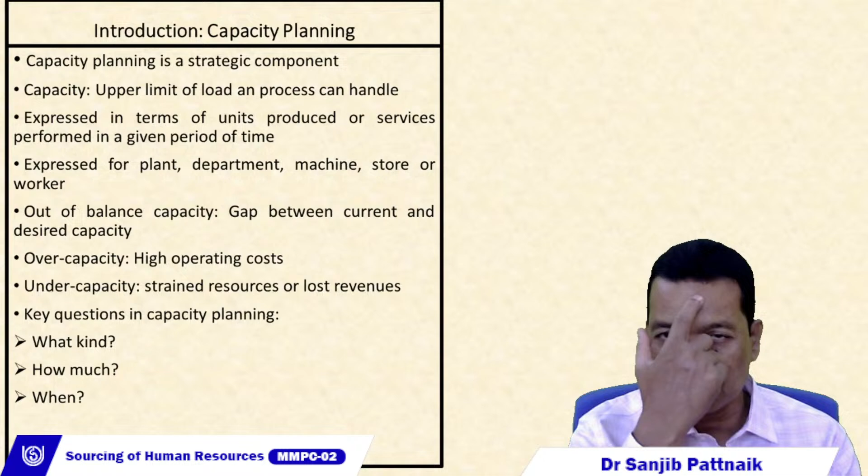Suppose we have gone for a 2 liter geyser when we had a small family. As time moves on and the family grows big, then we find the geyser that we have already installed in our washroom or the bathroom is not sufficient to provide enough hot water to the family members. And if we go for changing that, it will cost us a huge amount or a big amount. And once fitted, we go on using it till its life at least. Maybe somebody may say that it is for 6 to 8 years.

So always we say capacity planning is on a long-term basis of any organization. In other words, it is a strategic component of the organization. When we say capacity, it refers to the upper limit of load that a process can handle in a given period of time. As we are talking about the geyser example, we saw that the installed geyser was of 2 liters. That means the maximum water that can be sent into the geyser by the pipelines and the geyser will hold and heat it up is 2 liters.

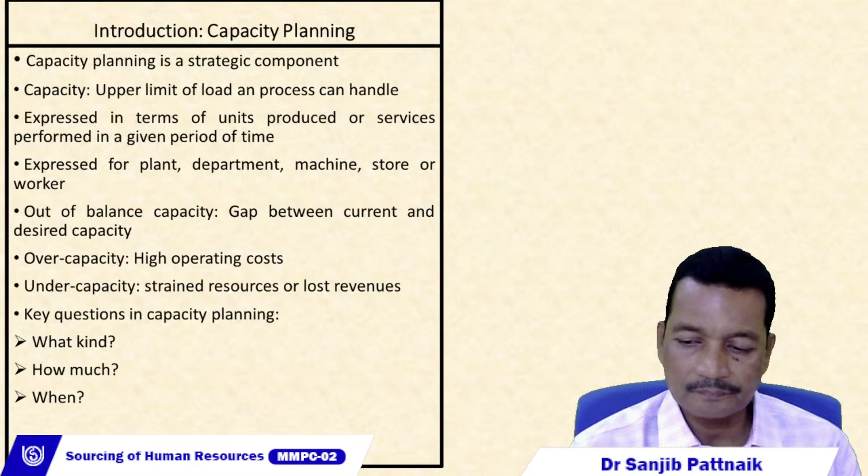Now let us see what is this process selection. When we are talking about process selection, we know that a number of processes are available for producing any product. So when we are talking of the process, it is the way of producing goods or services and how they will be organized in the factory place. This process design and capacity planning go hand in hand and influence the system design, because according to our capacity needs, the processes available may be varying. So we take both into consideration, the process selection and the capacity planning.

Now, when does this process selection decision arise? This comes into the picture when the organization is planning for new products and services. Now, in order to produce new products or to perform new services, what are the processes available to us? Out of that, which one is the best according to our capacity requirements or the future capacity needs?

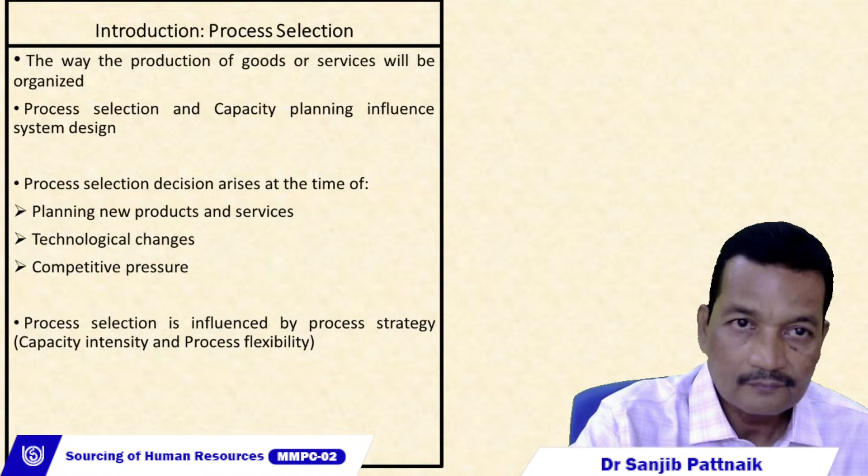Now, what are the different types of processes available to us in general, or what are the five basic types of processes? Here we have taken up five things: job shop, batch, repetitive or assembly lines, continuous, and projects. So here I'll try to take one example. Let us see their characteristics.

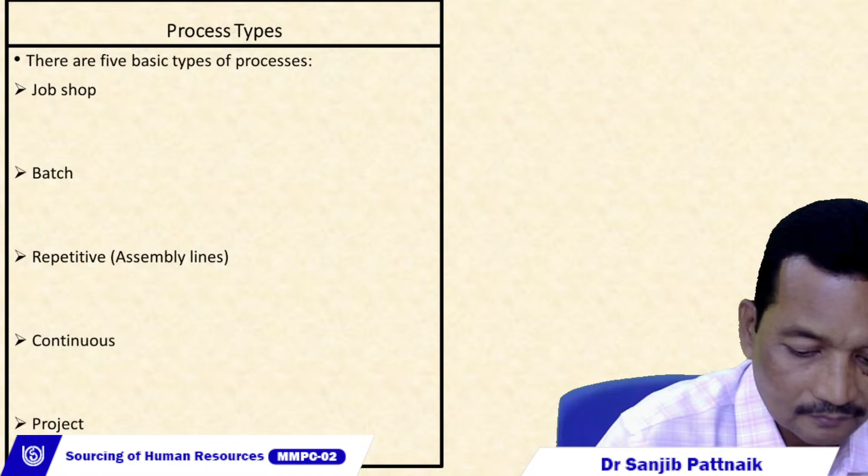All right. Let me explain the basic types of processes with certain examples. Job shop. I will try to say about the characteristics in terms of variety as well as the volume of production. For job shop, let us take an example of a tailoring shop. Nowadays, what happens when we go for purchasing shirts or pants or dresses, jeans, etc., from a supermarket? Suppose we go there in the apparel section or the clothing section, we find various types of dresses are being shelved.

There, you will find certain sizes like 32, 34, 36, 40, 42, etc. Suppose your waist is 39.5. Will that kind of thing be available in the shelf? No. Let us go to the tailoring shop. My waist is 39 and a half inches, suppose. And the tailor master will take the measurement, and he or she can produce accurately the required thing.

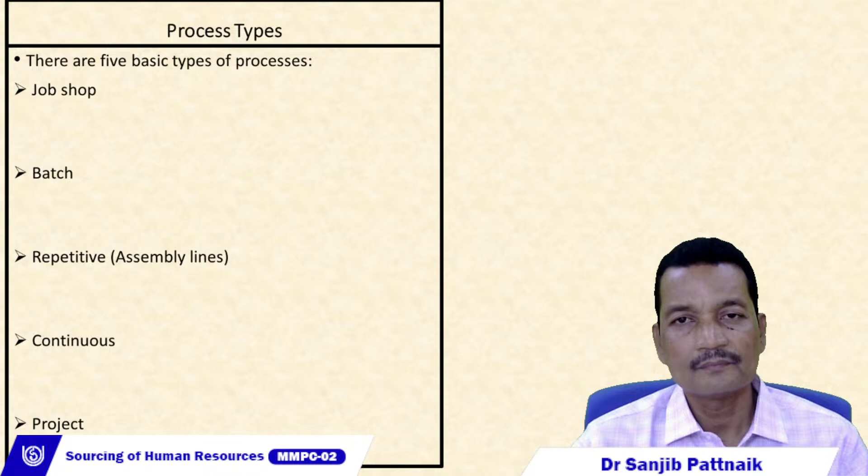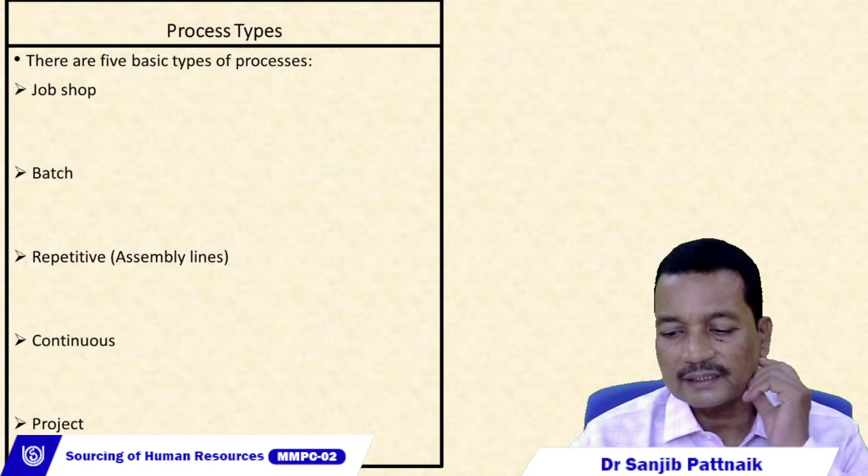One cannot say that the highway between A and B of 30 kilometers, whatever is the project cost and whatever is the way it is designed, is the same as the highway project between F and G, which is also of the same 30 kilometers. Each project will be unique. That means it differs from each other. But since the investment is very, very high, we say projects are the big brother of job shops. So these are the five basic types of processes.

When we look at capacity planning, the question is how much capacity we should set up first. Because once we set up the capacity, and it is a strategic decision, we have to continue with that for a number of years. If our forecasting is more accurate, then yes, we'll go on meeting the demands of the customers. Otherwise, there will be either overcapacity or undercapacity. So, capacity planning depends on future growth, the expansion, the market trends, and sales forecasting, etc.

Now, capacity planning differs from the way the actual world goes on. If there is a stable demand, then we know this is the amount of output required to meet the demands of the customer. Here, the capacity planning is easy. But in the practical or real world, the demand is very unstable. It fluctuates very highly. So there the capacity planning becomes a tedious job.

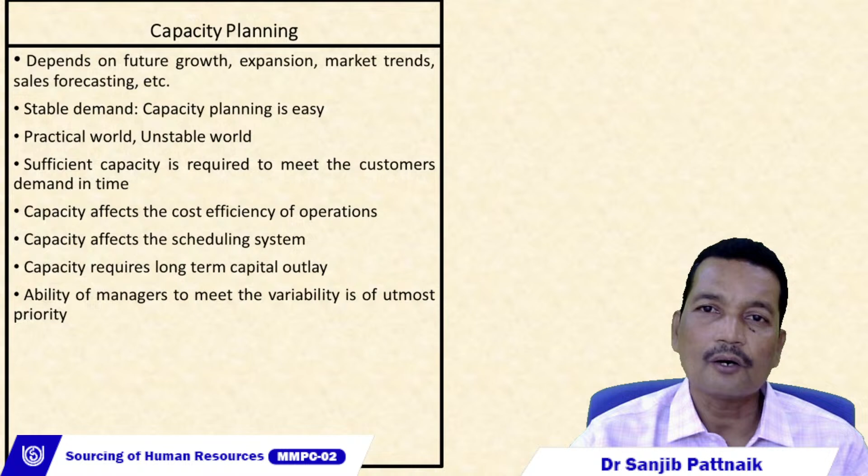So here the ability of the operation manager to meet the variability is of utmost priority. When we are talking of capacity decisions, the operation manager should think how to meet the future demands. If it is increasing, how we can manage with the capacity. If we are having higher capacity, but the demand is not there in the market, that means we have to run our production facility at a lower pace. In other words, the net impact of operating cost on the outputs will be higher.

Now, the capacity decision is required as huge capital is needed to set up the capacity. Now, in this cutthroat world of competition, in order to counter the competitors, we should always be ready to meet whatever is the demand coming from the customer side. So there you have to think about how much capacity we should be having for the organization.

It affects the ease of management. Management cannot say that we have set up the factory, our task is over. No. When we have set up capacity, what is the future trend? In the future we may go for capacity changeover, capacity revamp, capacity expansion, etc.

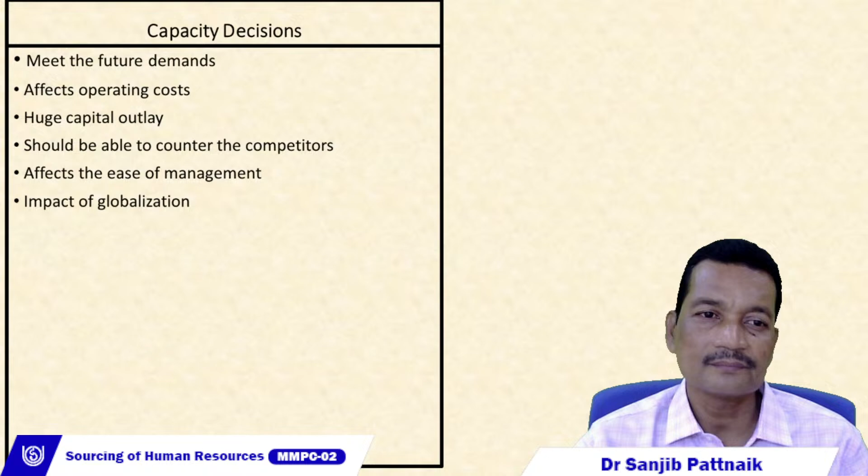Now, how we can measure the capacity? Before measuring the capacity, we talk about two things. One is design capacity. That means it is the maximum output rate in any given period of time for which the machinery or the worker can perform.

Effective capacity: suppose think about a worker. In an 8-hour shift, we may say that since each item takes half an hour to produce, the worker should produce 16 units in a given shift of 8 hours. But the answer is no. While working for a shift of 8 hours, the worker needs restroom allowances, food allowances, that means lunch, etc., which may take around 1 hour out of the 8-hour shift. So effectively, the worker will be working for 7 hours and producing only 14 items as compared to the design capacity, that is 16 units.

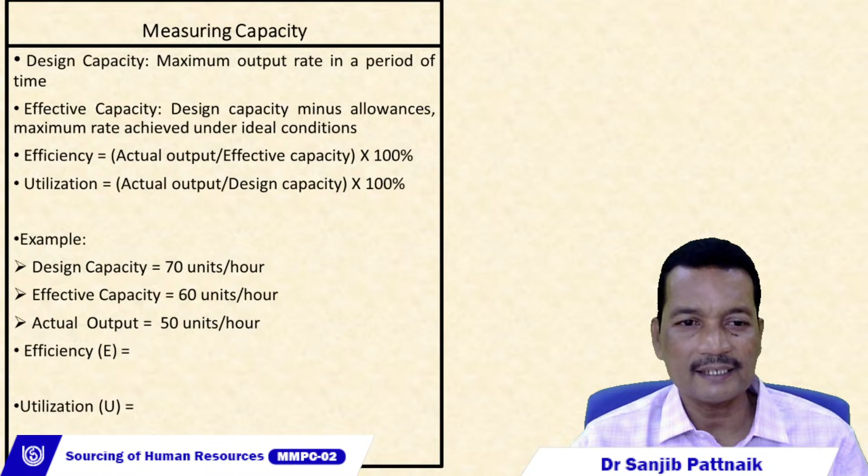Similarly, the machines also have downtimes, maintenance times. Those have to be negated from the design capacity so as to find out the effective capacity. When we are calculating the efficiency, we calculate it as the actual output divided by effective capacity. Utilization is calculated as actual output divided by design capacity. So this way you can calculate in percentage terms, and an example is given which you can practice.

So while developing capacity strategies, we think of how flexibility should be there in the systems, what stage of life cycle the capacity is in, any surge in capacity, how to meet that, what should be the optimal operating level, and what is going to happen in the future. When is the need for expansion of capacity? So here we talk about actual measured capacity is equal to the real time available into efficiency into utilization. In the previous slide, we have seen how we can calculate efficiency and utilization.

So here we have licensed capacity. That means as decided by authority, how much capacity we can set up. Installed capacity is the capacity of the production facility for which the factory has been set up. Rated capacity is, under normal conditions, what is the amount of production that can happen. So we can have long-term capacity strategies as well as short-term capacity strategies.

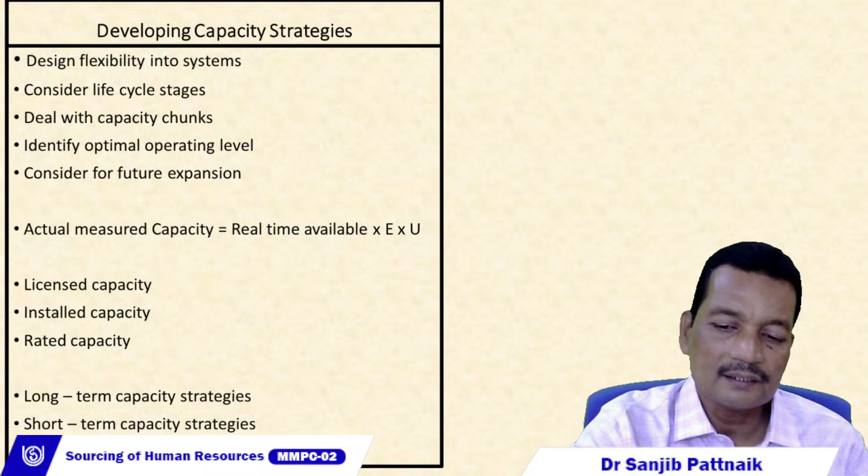So while performing capacity analysis, we try to benchmark the data. Whatever data we are having regarding the demand and the capacity setup, we benchmark it. We try to focus on the downtimes, why this has happened, how this can be reduced. If there are any process changes due to technical advancement, how we can do that. How can we tap unreached markets? That means unlocking the hidden capacity. And how production can be optimized.

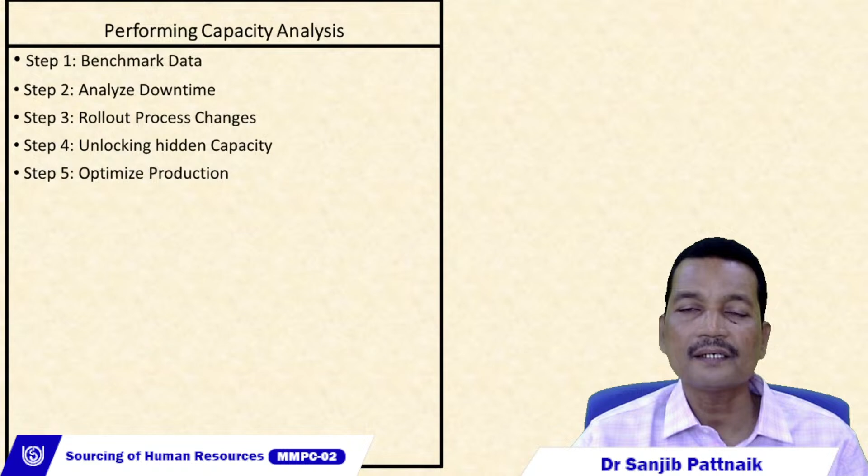So with this, we end our session on capacity planning. A slide was there where a small calculation was given regarding calculation of utilization and efficiency. All of us can practice that. We can change the data and have it.